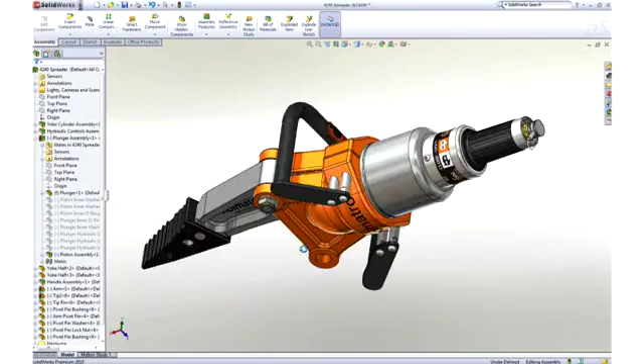This is your first look at SOLIDWORKS. In this brief demonstration, you'll see how Holmatro uses SOLIDWORKS to design best-in-class tools to help rescuers perform their critical life-saving tasks. Looking at this hydraulic spreader, you can see that there's some work to do. We'll create a part, assemble several parts, and create some drawings. We'll start by designing a new rod end part to connect the piston rod to the spreader arms.

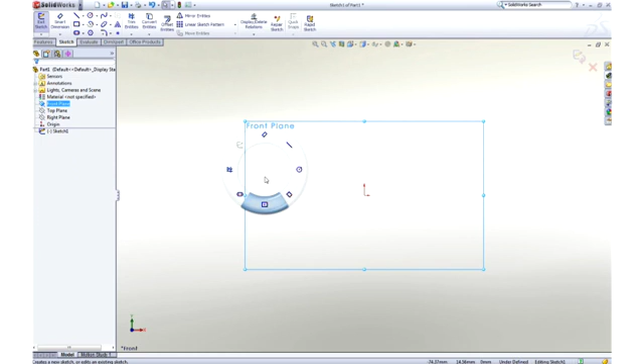The basic building block of a 3D solid model is a sketch, and sketching in SOLIDWORKS is extremely easy and intuitive. Using a mouse gesture, I get access to my most commonly used commands. Draw a slot, add some dimensions to establish its size, and then drag the center of the slot onto the origin to locate it.

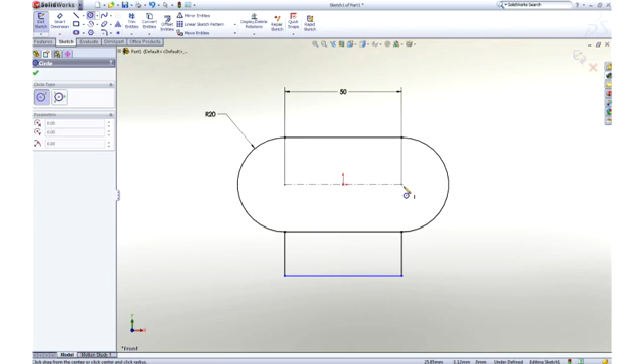Next, a rectangle is drawn using one of the many sketch tools, and then we will add a couple of circles to hold the link pins. The two circles should be the same size, so a quick window selection reveals a pop-up toolbar, and an equal constraint is added to lock their size together.

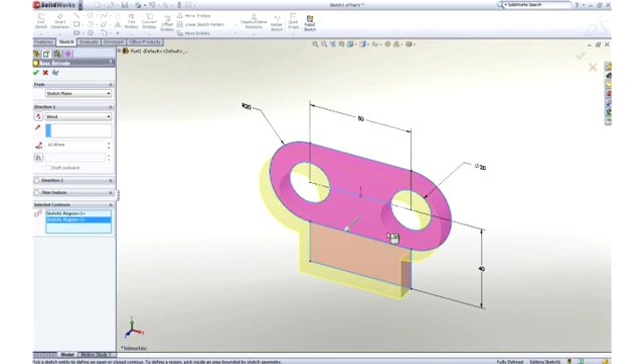Notice that as I work, all of the commands and tools are right at my cursor. We call this our heads-up user interface, which is designed to keep your focus on the screen to make you more productive. Now that this 2D sketch is finished, let's make it 3D by extruding it. It can be extruded in either direction, or in this case we will extrude it 40 millimeters, about the midplane.

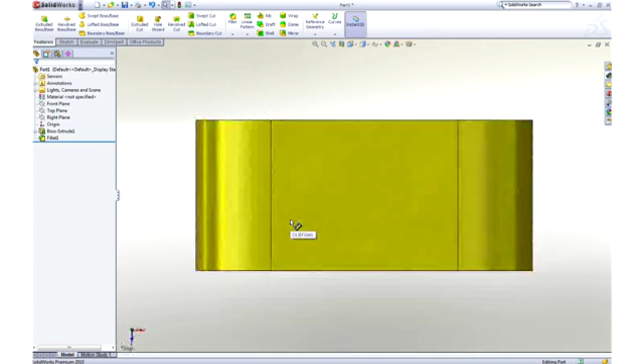To smooth some of the sharp corners, we can add some fillets. Their size can be graphically manipulated on screen, or we can key in a dimension to add some precision. Let's add a pocket to the center of the part to accept some links. This time we will use a center point rectangle to capture symmetry while we sketch, and a dimension to control its size.

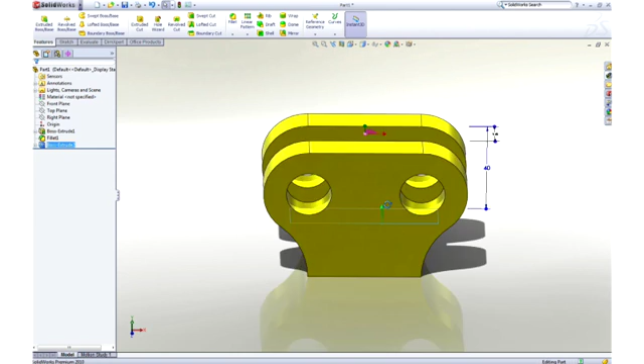Using Instant 3D technology, we can add material by dragging the sketch away from the part, or remove material by dragging into the part. The sharp corners at the bottom of the pocket can be rounded by adding another fillet. 2 millimeters would be good. Finally, we can ease the outside corners with a chamfer. Using the on-screen feature callouts, we can easily control its size while we create it.

Now that you have the hang of it, we will jump ahead a couple features and add a tapped hole at the bottom using the hole wizard. Gone are the days of looking up hole data, because all of the hole types, standards, and hole sizes are available. Choose the hole parameters, locate it, and SOLIDWORKS takes care of adding all of the proper information to define the hole. Let's leverage our previously created chamfer by dragging and dropping it onto the bottom edge to make a copy.

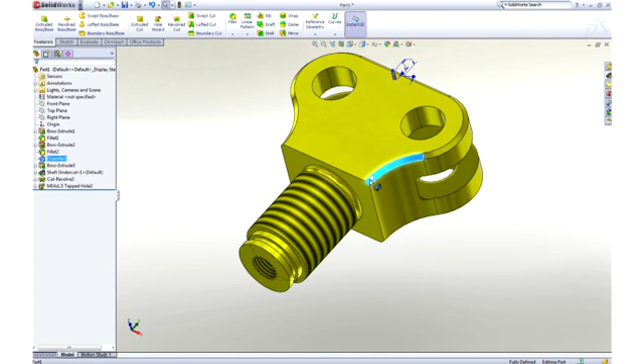The part looks good, but maybe a couple of changes would help to refine it. Changing the dimension value changes the geometry, and using Instant 3D technology, dimensions can be dragged and we get real-time feedback of our change. It's important that we fully describe our part beyond just the geometry. Properties such as part number or description can be added and leveraged later in the drawing title block and BOM.

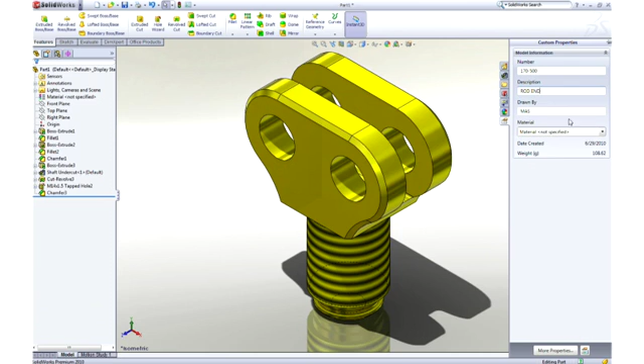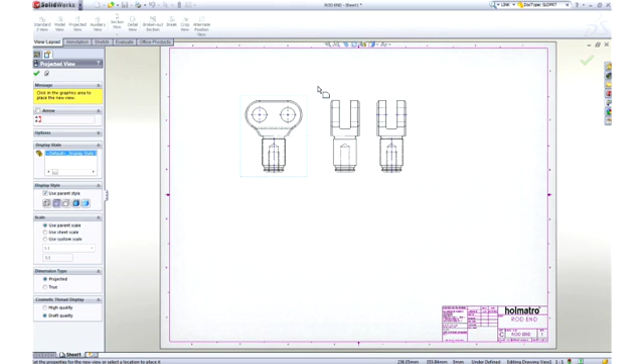Materials can be applied from a list of favorites or from a broad database of materials. All visual and mechanical properties are applied. Notice that the weight of the part has been updated to reflect the new material. To document our design, let's create a drawing. SOLIDWORKS displays the default views of the part in the View palette. We simply drag a view onto the sheet, then we can create any desired projected views, including an isometric.

Hidden lines can be removed or views can be displayed as shaded. For this part, it would be desirable to create a detail view of the area near the bottom for clarity. Adding dimensions is simple. All of the dimensions that were used to create the part are available to be placed on the drawing. Since symmetry was used during design, we can add a couple dimensions to locate the round boss at the bottom. The Rapid Dimension Manipulator appears to properly place and space the dimensions at even intervals.

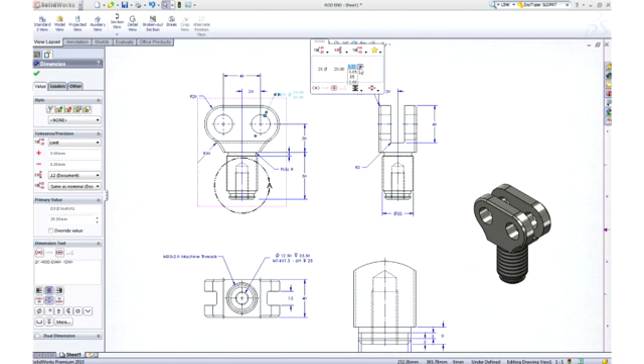Selecting a dimension, we are presented with a dimension palette where we can add more definition to the dimension, such as tolerancing or formatting. These 20mm holes will not accept the 22mm pins that we will be using. No problem. Making this change right here on the drawing will update all of the views and change the part as well. Let's move on to do some assembly work, and with SOLIDWORKS, it couldn't be any easier.

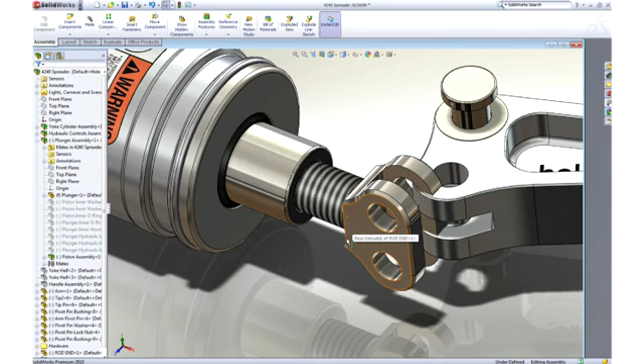For our rod end, simply drag the round boss and drop it onto the cylinder rod. This adds a concentric assembly mate between the parts. To position it along the axis, we can drag the edge of the rod end to the end face of the cylinder rod to add a coincident mate. Next, we will add a link to stop it from rotating.

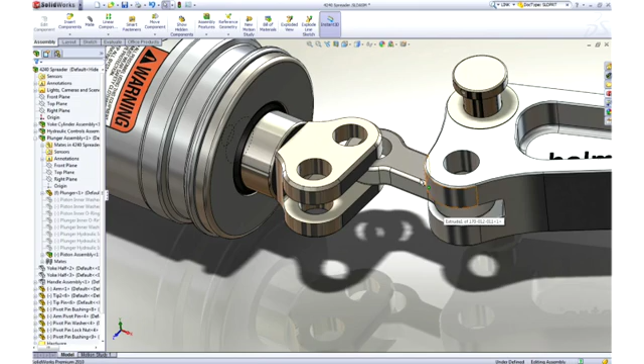To find this part, we will enter link in the search assistant. SOLIDWORKS not only returns components with link in their file name, but also digs down into the part properties to find the term. As before, we can drag this link from the search pane and drop it on a circular edge of the arm to locate it. Then, using the same drag to mate technique, we can hook it to our rod end.

From the same search pane, we can assemble the pin. This pin was modeled for multiple uses and contains many sizes or configurations. We simply choose the diameter and length that is desired, and SOLIDWORKS builds the part to specification.

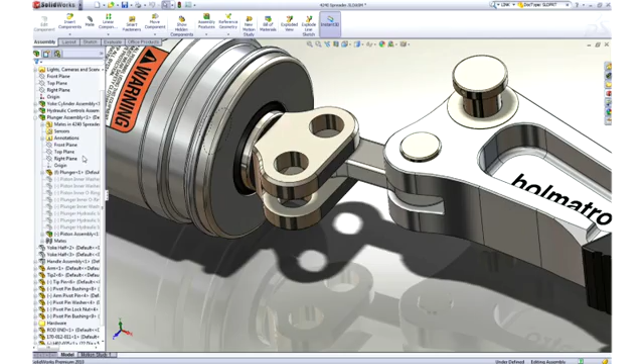Most assemblies contain many hardware items like screws, nuts, washers, and the like. SOLIDWORKS provides a toolbox of such items containing thousands of parts with millions of configurations of those parts for your use. Notice that as we assemble the snap ring, it automatically sizes itself to the shaft to which it is placed.

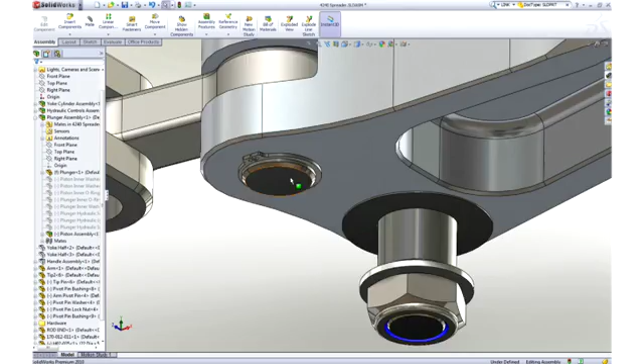SOLIDWORKS allows us to copy parts along with their mates, which is a big time saver. Simply identify the hole and mating face for each hole where the pin is to be placed. As you can see, these pins are too long for the rod end. Remember, the pin was modeled in multiple sizes, so we can easily change the length of just these two without having to reassemble.

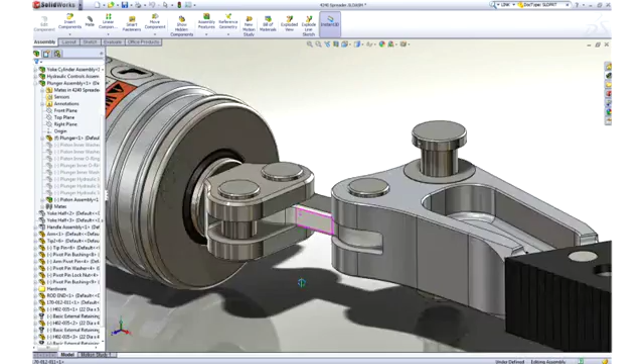Interference detection is an important aspect of 3D design, and SOLIDWORKS takes it a step further with real-time collision detection. Notice that as we move the arm through its range of motion, it interferes with the link. SOLIDWORKS provides both visual and audible feedback of the collision.

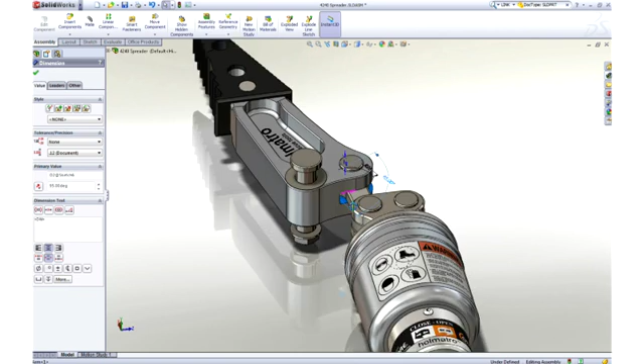A change is in order, and it can be done directly on the part right here in the assembly by changing the angle dimension defining the pocket on the arm. Now, as we recheck for collision, we can see that we have full range of motion with no interferences.

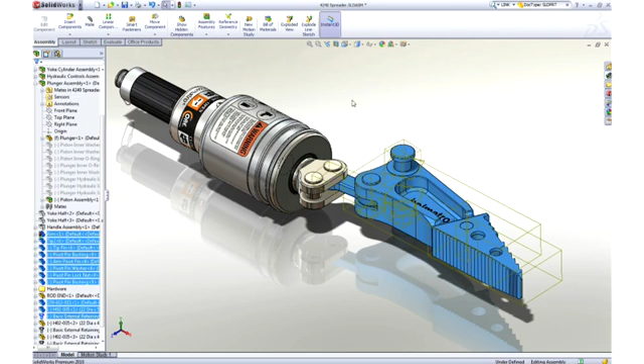Half of the spreader is complete, and we can save assembly time by mirroring the parts about the central plane to the opposite side. SOLIDWORKS allows us to verify and change position of each part, and even to create opposite-hand versions of individual parts. In just 2 minutes, there were 19 parts added to this assembly, and our assembly task is complete.

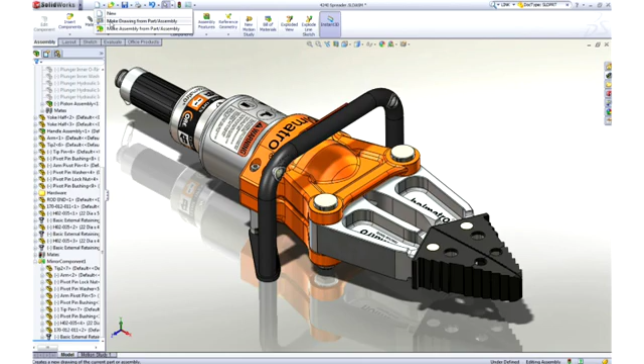Let's turn on the parts that we have previously hidden and document this assembly. We'll wrap up the demonstration by creating an assembly drawing. As we did when creating the part drawing, we can drag the required views onto the sheet. To better describe this spreader, we will use an exploded view of the assembly.

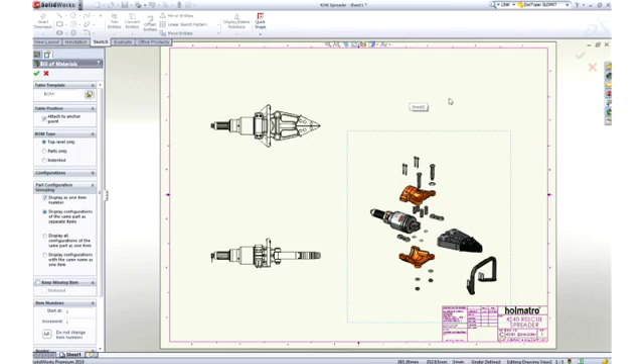No assembly drawing is complete without a bill of material. SOLIDWORKS itemizes the parts, extracts information like description, and adds the appropriate quantities. No bill of material is complete without balloons, and they can be added automatically.

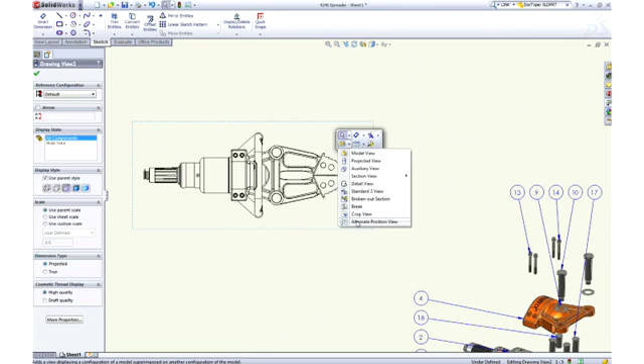To depict the motion of the spreader assembly on a 2D drawing, we can add an alternate position view to describe the assembly in both the open and closed positions. Add a couple of reference dimensions, and our assembly drawing is complete.

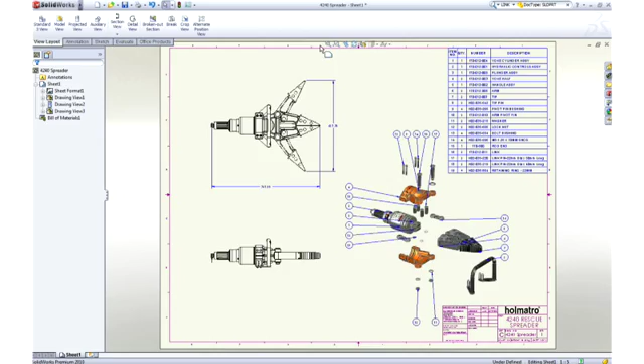We strive to deliver simple but effective tools to help you design better products faster. When you have an idea for a great product, SOLIDWORKS provides the tools to design it in less time and at lower cost. This has been your first look at SOLIDWORKS.